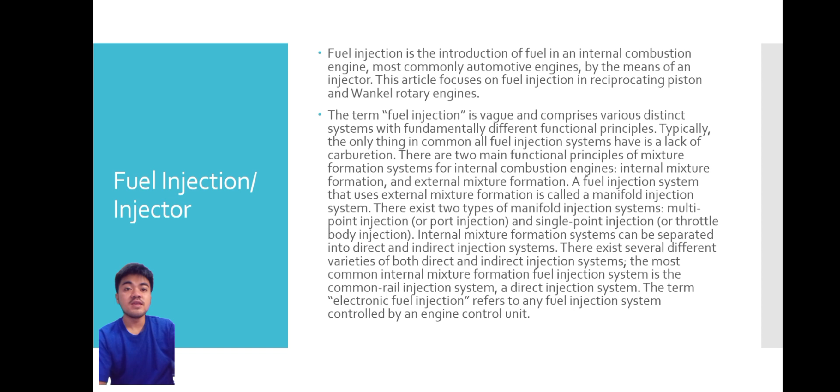Internal mixture formation systems can be separated into direct and indirect injection systems. There exist several different varieties of both direct and indirect injection systems. The most common internal mixture formation fuel injection system is the common rail injection system, a direct injection system. The term electronic fuel injection refers to any fuel injection system controlled by an engine control unit.

Fuel pressure regulator: a fuel pressure regulator helps maintain the fuel pressure in the electronic fuel injection system. If the system needs more fuel pressure, the fuel pressure regulator allows more fuel to go to the engine. This is important because that is how fuel gets to the injectors. Blocking the pass-through to the fuel tank off completely, the fuel pump will try to force too much fuel into the injectors, which will cause them to fail, and you will end up needing another auto repair service.

Fuel pressure regulators are a vacuum-operated, spring-loaded diaphragm that enables a vehicle fuel delivery system to maintain a constant pressure. When the vehicle is at idle, the regulator is open, allowing fuel to bypass the delivery system and go back into the tank.

When the engine produces less vacuum under load, the pressure regulator diaphragm closes and allows an increase in fuel volume to be provided to the injectors while maintaining a consistent pressure. You will find fuel pressure regulators typically located at the end of the fuel rail on mechanical return systems, or at the fuel tank in mechanical returnless fuel delivery systems.

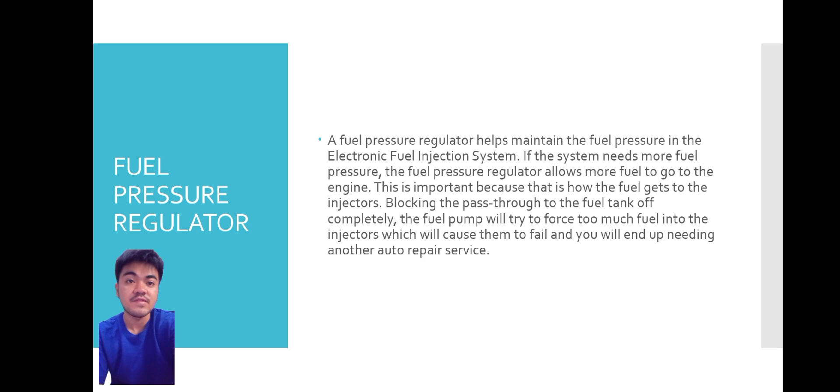Fuel pump: a fuel pump is a component in motor vehicles that transfers liquid from the fuel tank to the carburetor or fuel injector of the internal combustion engine.

Carbureted engines often use low-pressure mechanical pumps that are mounted outside the fuel tank, whereas fuel-injected engines often use electric fuel pumps that are mounted inside the fuel tank. Some fuel-injected engines have two fuel pumps: one low-pressure, high-volume supply pump in the tank, and one high-pressure, low-volume pump on or near the engine.

Fuel pressure needs to be within certain specifications for the engine to run correctly. If the fuel pressure is too high, the engine will run rough and rich, not combusting all of the fuel being pumped, making the engine inefficient and a pollutant. If the pressure is too low, the engine may run lean, misfire, or stall.

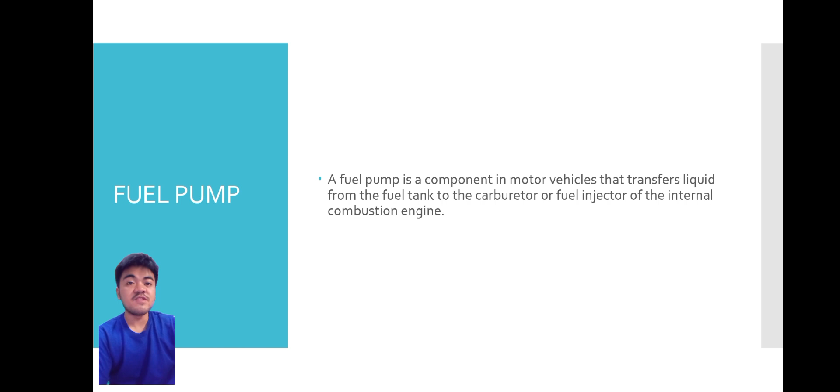Types of fuel pumps: mechanical, electrical, and high pressure fuel pump.

What is a mechanical fuel pump? Mechanical fuel pumps are basically low pressure type fuel pumps, sometimes also used for high pressure, whose main work is to transfer the fuel from the tank to the fuel bowl of the spark ignition engine. The mechanical fuel pump consists of two kinds of pump: diaphragm type fuel pump and plunger type fuel pump.

Diaphragm type fuel pump is basically a positive displacement pump which sucks the fuel by expanding and contracting motion of the diaphragm. The pump body consists of inlet and outlet check valves, which are one-way valves. As the diaphragm contracts, the pressure inside the pump becomes lower than atmospheric pressure and the fuel gets sucked through the inlet valve.

And as the diaphragm expands, the fuel inside the pump pushes out through the outlet valves. The expansion and contraction motion of the diaphragm is controlled by a lever actuated by an eccentric cam motion. This eccentric cam is connected to the crankshaft of the engine through proper gearing arrangement.

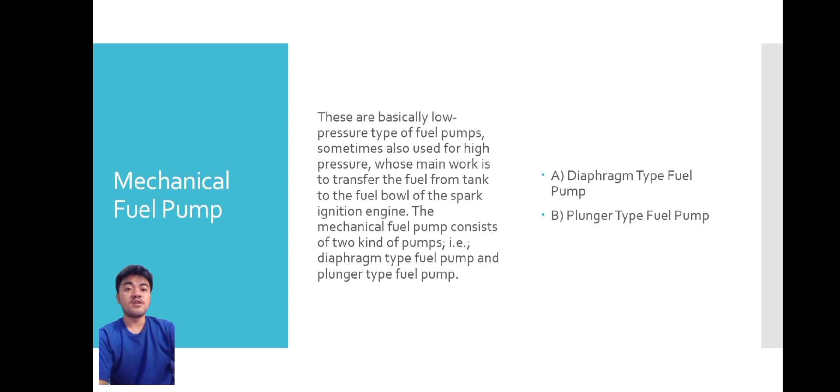The second one is the electric fuel pump. These kinds of pumps are generally used in fuel injection systems, which are the essential part of modern motor vehicles. It creates high pressure to deliver the fuel out of the pump. This high pressure may cause the fuel to ignite inside the pump itself and may be a reason for explosion.

The current to operate the fuel pump is supplied by the battery of the vehicle. An ECU or electronic control unit is also available there which properly controls the output pressure and volume of the fuel, and in addition, it also meters the incoming fuel from the tank. The ECU helps the vehicle save fuel and hence gives better mileage of power.

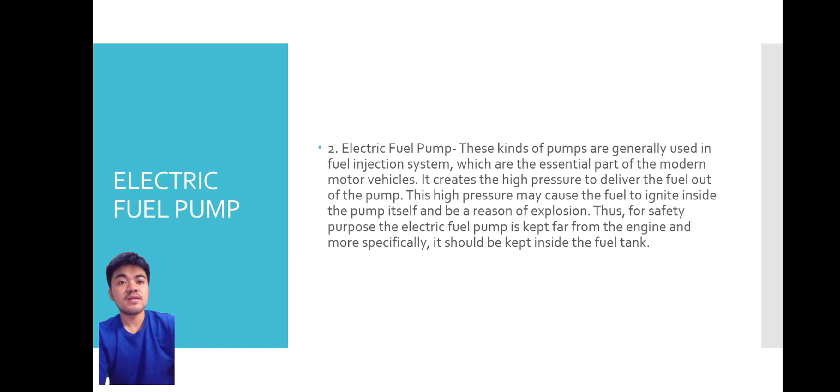Number 3, high pressure fuel pump. These pumps are generally used for the injection of fuel into the combustion chamber, specifically in compression ignition engines. These types of pumps work above 200 pascals.

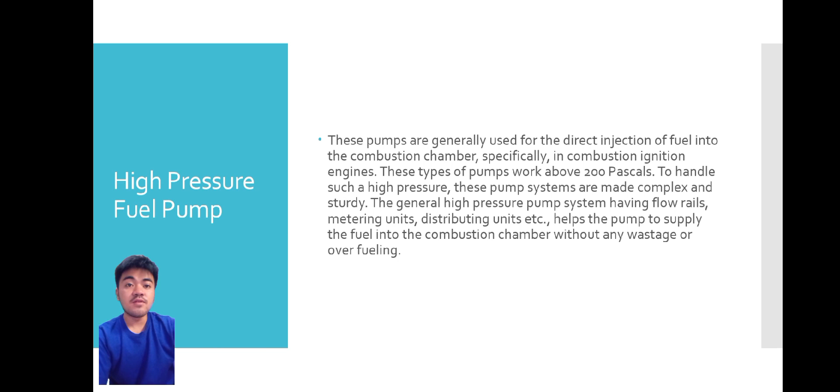To handle such high pressure, these pump systems are made complex and sturdy. The general high pressure pump system has flow rails, metering units, distributing units, etc. This helps the pump supply fuel into the combustion chamber without any wastage or over fueling.

Fuel tank. A fuel tank in the vehicle is an important component of the fuel system in an internal combustion engine. A tank is used to store motor fuel such as petrol, diesel, or gas. Present-day fuel tanks can be made of different advanced materials such as ferroalloys, aluminum alloys, or plastics.

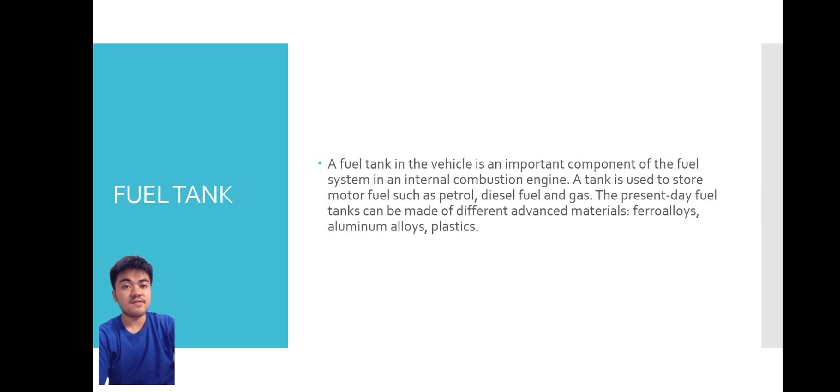And last, the fuel line. A fuel line is a hose used to bring fuel from one point in a vehicle to another, or from a storage tank to a vehicle. It is commonly made of reinforced rubber to prevent splitting and kinking.

All parts of the fuel system are connected by fuel and vapor lines and hoses. This permits delivering fuel to the carburetor, returning excess fuel to the tank, and carrying fuel vapor.

Lower pressure or partial vacuum in the fuel pump also causes fuel to vaporize. This condition produces a vapor lock, due to which the fuel pump delivers only vapor to the carburetor. Also, the vapor goes out to the vent without the engine receiving any gasoline.